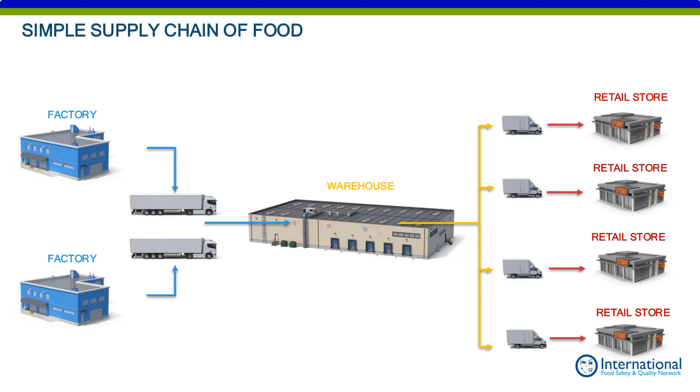And from here, maybe a lot of smaller transporting units are transporting products to the retail stores. And this is how we consider the supply chain, and how we understand the supply chain. But in this supply chain, what we consider as a safety issue is actually only temperature and hygiene.

And I know that this is true because when MFIT and the team participated in the Dubai Food Safety Conference last year in 2024, we put a questionnaire to all of these participants at the conference, and we asked them, what do you think is the biggest risk concern for safety of the food in transport? And everyone said it is temperature that is the biggest risk, and then a few places after it is hygiene.

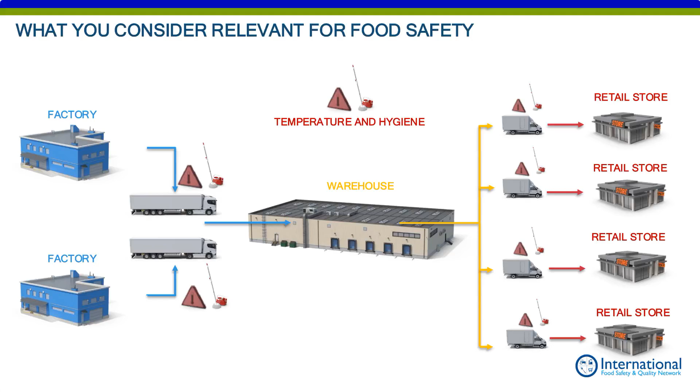But reality is quite different, because we have a start with the raw materials production, which is transported to a primary producer. The primary producer could be a mill that is producing flour. It is transported with the silo transport to the secondary production. This secondary production could be a confectionery or a bakery producer that produces the final product, and then as a final product, it is transported to the retail store.

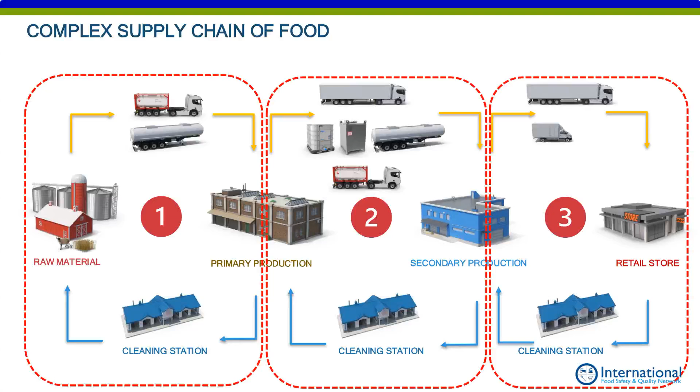In between all of these activities of transporting, producing, or selling, there is a cleaning of the transport, and there is a cleaning station. So you see now the supply chain becomes a little bit more complex. Looking at the supply chain, it doesn't go only inside of the country. Yeah, the supply chain can be even more complex.

Look at this complex supply chain for the chocolate example. There is sunflower oil that could be produced in Serbia, glucose syrup produced in Germany, milk powder produced in Poland, and cocoa mass produced in Switzerland. Then we have activities of loading in the different transporting units, and all of them transport these raw materials to the chocolate production that is located in Italy.

What is going on there in Italy? It happens actually that after it is unloaded, all the transporting units are going to the cleaning station, probably the cleaning station in Italy, because of the logistic chain and because it is more relevant to go there so as not to lose the kilometers or the money.

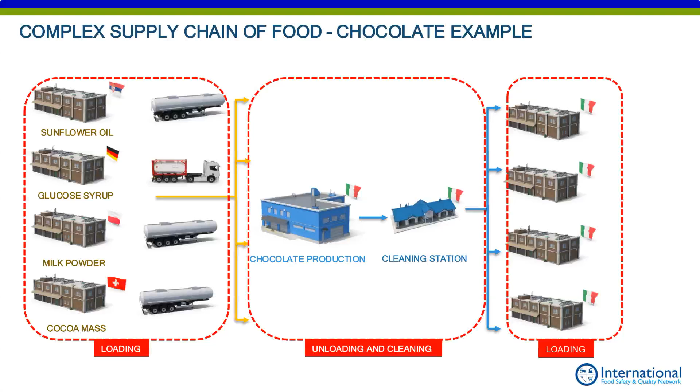After the cleaning station and after the cleaning, all of these transporting units will go probably to different factories in Italy to load other products. Yeah. So you see now this supply chain becomes a little bit more interesting. So let's just follow one supply chain.

For example, one transporting unit from the previous example could be transporting sunflower oil from Serbia to the Italy factory. Then it unloads this sunflower oil. Then it's empty, but it's dirty from the product, of course, and it goes to the cleaning station in Italy. After the cleaning, the clean transporting unit goes to loading again in an Italy factory, and here it can load milk cream, for example.

I use this example just to show you that now when this transporting unit is clean and loaded milk cream, practically it loaded also some kind of hazard, which means that it loaded, in this case, an allergen. So now we have an allergen in the supply chain. After that, this transporting unit is going to Austria, maybe to ice cream production. They unload this product, and then we have an empty and dirty transporting unit.

And this transporting unit is now dirty with the milk cream, which means that it is dirty from the allergen. If any insufficient cleaning happens here in the cleaning station in Austria, this means that even though this transporting unit is clean, it has some remains of the allergen, and then any additional loading could potentially contain this allergen. So this means that when this barley malt is loaded, it could contain the allergen within. Of course, what is the problem here everywhere, what I'm talking about?

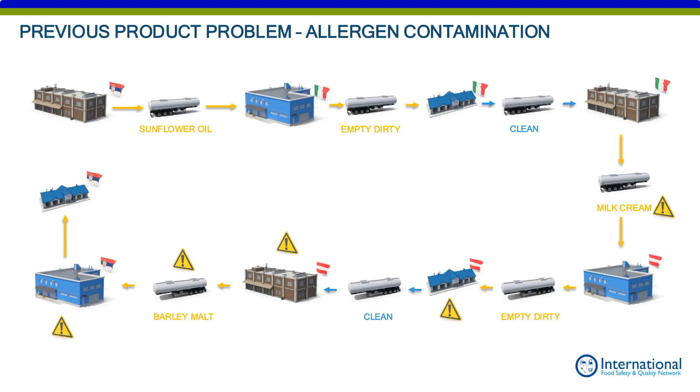Of course, in many cases, companies will define what is the allowed previous load. Companies will say, we do not allow this type of load before we are loading barley malt, because we don't want to have any potential contamination of our product. So this is how this supply chain becomes very complex.

Looking at the other example of the internal supply chain, I will show you how dairies are functioning in many cases. So let's look at the example of the dairy. We have a transporting unit that is collecting milk on one transporting line on this side. After it collects the milk from different farms in the morning, it returns back to the dairy, and raw milk is unloaded to this dairy, after which cleaning of the transporting unit happens, probably with the CIP of this dairy factory.

And after the cleaning is done, what is going on? In many cases, all over the world, this transporting unit is not owned by the dairy. It's probably some tank that is owned by a private company, and after it is cleaned in this first dairy, it goes and parks on the parking of the company, or in many cases, it parks in front of the house of the driver, who in some cases could also be the owner of the transporting unit. So please pay attention that this could have some influence on risks happening in the supply chain.

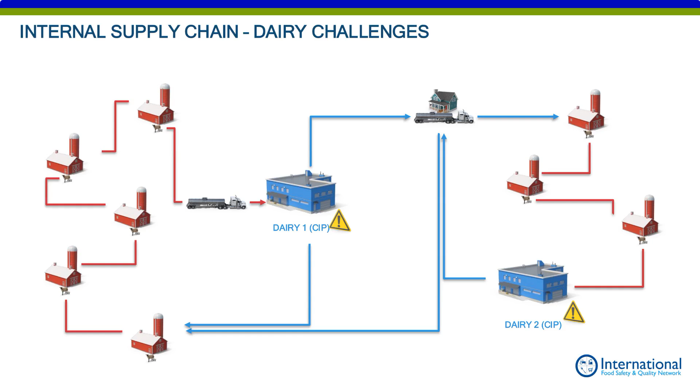So looking at the whole supply chain, there are lots of risks happening there. When we look at the loading process risks, there are insufficient controls of transport hygiene. Then the control of food defense and food fraud aspects, like using seals and documented evidence. Then control of transport suitability: is your transport suitable to transport the food? Then control of cleaning evidence, evidence of previous loads, and of course traceability. These are just the problems at loading for the primary producer or any producer doing the loading of the product.

Then there are risks connected with the transport units: the food suitability of transport materials, transport unit design, maintenance records, control of transport suitability, control of cleaning evidence, food defense and fraud suitability connected with the transport or transporting company.

Of course, there are risks connected with the unloading process. This could be connected with insufficient pre-unloading controls. Again, controls of food defense, food fraud, and cleaning evidence that gives you evidence of the previous load and that the cleaning was done in a sufficient way. Of course, controls of product, because we always do some specific controls of the product before unloading. And again, we come to the question of traceability.

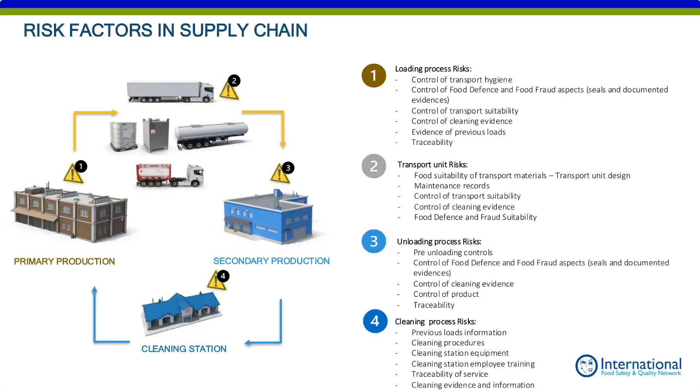And of course, in the whole supply chain, we always mention the cleaning station. Let's not forget it, because cleaning process risks also exist, connected with proper information about previous loads, the cleaning procedures and their application, cleaning station equipment, cleaning station employee training, traceability of the service, cleaning evidence, and of course, the information.

These are the risks, but what are the contaminants in food transport? I will say that the biggest contaminants are physical contaminants. You don't see them on this slide, but I'm always mentioning them.

And these physical contaminants are actually coming from the transporting units. It could come because of the bad design of the transporting units, but it could also come because the transporting units are old, they're always moving, there are some damages happening, there are different types of products transported, different types of cleaning happening, and of course there are lots of parts that are also made out from rubber, like some gaskets, closings, sealings, etc. And these could be all also physical hazards.

And in many cases, in order to prevent your facility, you need to have different kinds of sieves, filters, controls on loading to see for potential physical hazards. Of course, other contaminants and hazards can come from the point of view of biological hazards, which could be, of course, pathogen microorganisms, but also yeasts and molds and some of the indicator organisms coming from the cleaning station due to insufficient cleaning procedures or due to cross-contamination or any problems with the previous information of the transported product.

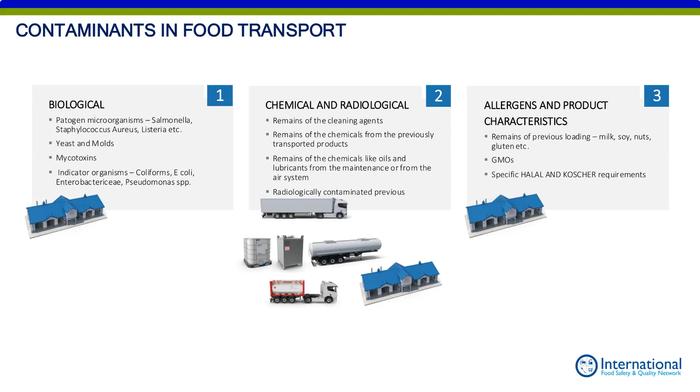When you do your hazard analysis as a part of HACCP, it also contains biological, physical, chemical, radiological, allergens, and also product characteristics as hazards. I have shown you on the previous slide where these risks are. So this is a supply chain. These are the risks in the supply chain. And we have shown you these cleaning stations that are doing the cleaning process. But who has defined this cleaning process or the cleaning program? Who is giving the requirements actually?

Some requirements are moved from the primary or secondary production and given to the transporters or the logistic companies. The other requirements are given in the legislation or given in the standards. But how is it given? It is given to those who are defined as FBOs or food business operators. So if you look at all the legal documents, all the requirements of the producers, and all the standards, food business operators are those who are handling the product. So no matter if you are producing it or transporting it or storing it, you are handling the product. This means that you are a food business operator.

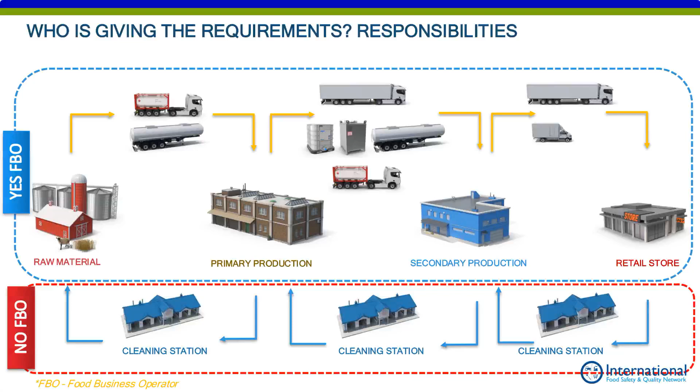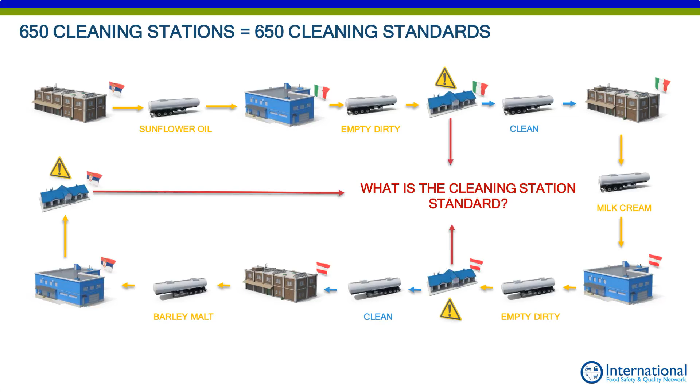But cleaning stations, which are not handling the product but are handling the service in connection with this product, are not registered as food business operators. And this brings the problem for the supply chain. Because in that case, you have to define for the cleaning station what they will do, and you have to have the knowledge to define the requirements for them. What happens at the end? The different cleaning stations, like in this example we mentioned in Italy, in Austria, in Serbia, are working according to different cleaning standards. And we always joke that 650 cleaning stations only in Europe means 650 cleaning standards. And this needed to be solved with unified cleaning procedures and unified standards.

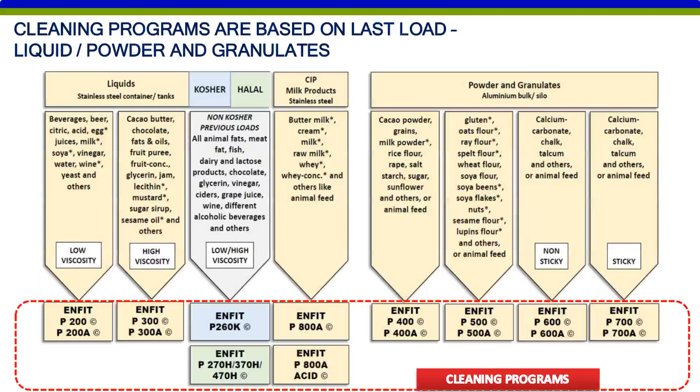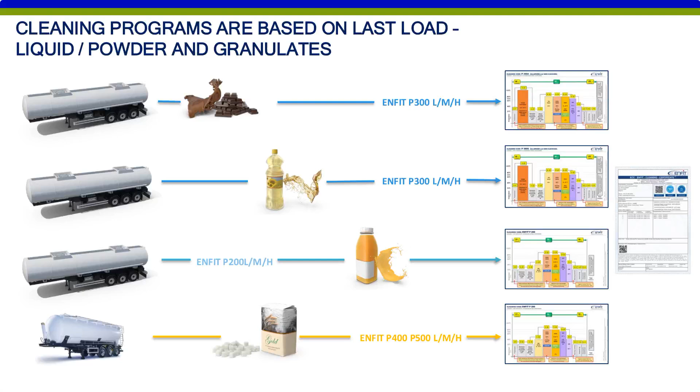This is why ENFIT, the International Association for Supply Chain Safety, sat down with the working groups and said, okay, now we need to define the cleaning programs based on the last load, no matter if it's liquid, powder, or granulate products, and also define specific cleaning procedures for kosher and halal. And this is what ENFIT has been doing in the previous years. In reality, it means that these cleaning programs are based on the last load: transport of chocolate, oil, juices, these are all liquid products but with different viscosities. And based on that, there are specific programs to be applied to clean these transporting units.

I will go shortly through these programs showing you how they work, but I will not talk a lot about them because today our focus will be on validation, verification, and monitoring of the cleaning programs, no matter which kind of cleaning programs are used. When you look at ENFIT cleaning programs, the idea is to have standardized cleaning programs in the whole world.

So this means that if you are using the ENFIT P300 program for cleaning of chocolate or this type of viscosity products, it could be low, medium, or high cleaning. And this is based on what steps this product will pass in your factory when it is received. So if there is some kind of step, as Tetra Pak says, a kill step in your factory, then you can use the standard of low cleaning. You don't need specific long cleaning, etc.

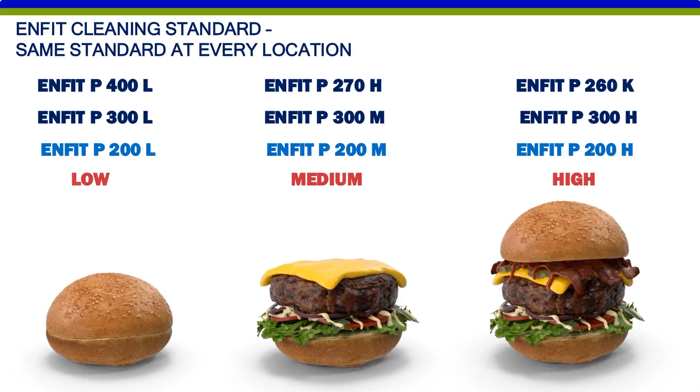But if there is no kill step, this product needs to be transported in very high safety conditions. Then you need a high cleaning, which lasts a lot longer and gives you, of course, support that the product is transported in a safe transport. So ENFIT cleaning programs, you can find them, of course, on the website. I will just mention that there are, as I said, low, medium, high.

It is based on the timing of the cleaning, but the procedures are the same in all of these programs, which means that cleaning must be performed completely of everything that is on the transporting unit. This means the hoses, the connections, the pumps, the manholes, the main tanks, the chambers, everything that is there on the transporting unit needs to be clean, no matter if it is a light, medium, or high cleaning.

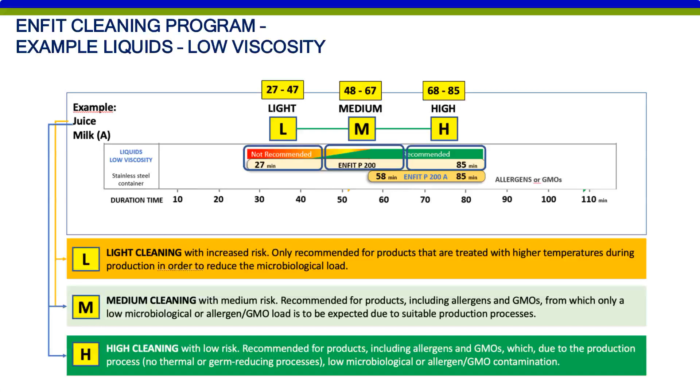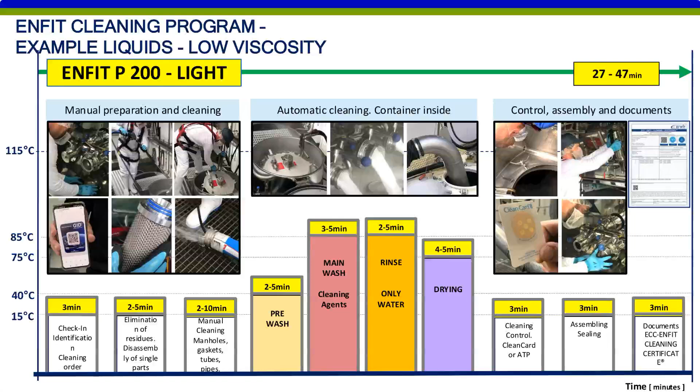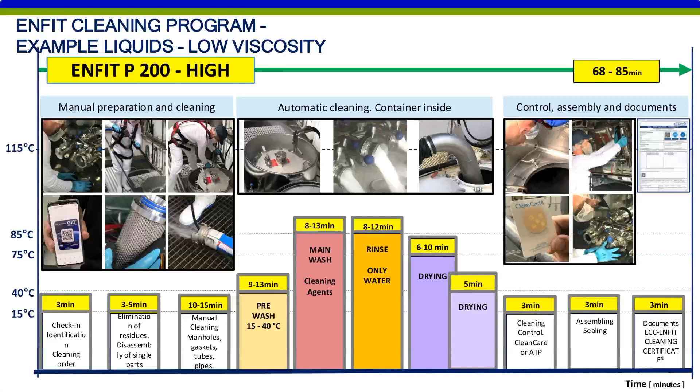So you see now how this timing changed from 68 to 85 minutes, and this timing is sufficient, of course, to clean it and have a transport that is practically safe from the previous load, but also safe for loading of your product, and that it can be guaranteed. So no matter if this cleaning procedure is defined or selected, what shall we do now?

So let's say, for example, you are a company who has a transporter and you are not directly responsible for selecting the cleaning station. In that case, the transporter selects the cleaning station himself, which means that before loading a product at your site, he needs to go for a cleaning. And this cleaning is done according to some procedures. The question here is, who defined these procedures? Is your company defining these procedures? Based on what? Is the transporter defining these procedures? And do you trust in his defined procedures? Or does everyone in the chain trust in the procedures of the cleaning station?

You know, in the previous year, ENFIT has done transport hygiene risk analysis in more than 50 companies, and we gathered results that, of course, the supply chain has many risks that I'm presenting to you today here. But also, we have gathered the information that these procedures are not defined very well, and even if they are defined, they are not respected after a certain amount of time.

So one of the main things that you have to do, no matter who defined the procedures of cleaning, if you're certified according to the standards for food safety, for example, GFSI certification schemes like FSSC, IFS, BRC, they are asking you to do the validation of the cleaning. So last year, we have done the validation of the transporting units for different cleaning programs of ENFIT, ENFIT P200, P300, and I will give you some overview of the validation steps and our conclusions, and I hope I will help you also in defining your own validation procedures for the cleaning of the transport.

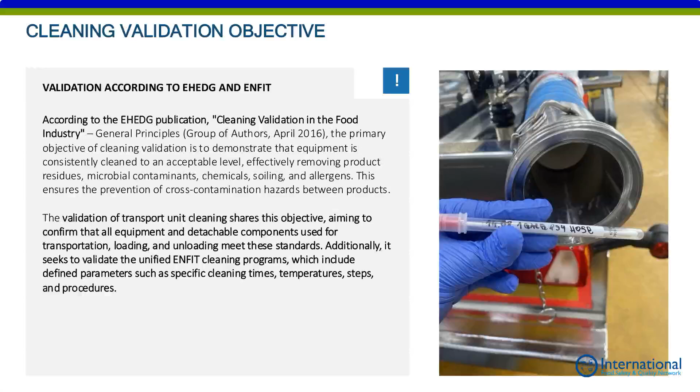So this ensures the prevention of cross-contamination hazards between products. So in that case, with the ENFIT working group, when we did the validation of transport unit cleaning, we shared this objective, aiming to confirm that all equipment and all detachable components used for transportation, loading, and unloading meet these standards. Additionally, we seek to validate ENFIT cleaning programs, which include defined parameters such as cleaning times, temperature, steps, and of course, specific procedures.

Once again, I want to just go through it with you. What is validation, monitoring, and verification? I know that you know, but this is just in the context of the transport. So validation is done before, and it means that it is performed after the cleaning program is established and proves that the cleaning program is effective and can be used. It must be performed according to predefined procedures, and it must be recorded. In case the cleaning program is not set up in a good way, re-editing of the process and revalidation should be performed before first approval of use.

So you shouldn't use the cleaning program if it's not validated and if it's not, of course, effective and showing that it works. Validation can be done in different ways, through auditing, testing, controls, through internal team use, through laboratory services, external team engagement, etc. When you have done the validation, when you have said that your cleaning program is effective, we need to do the monitoring then.

What does this mean? This means that every day we are cleaning our transporting unit according to the defined program. In the dairies, every day we are using this CIP program that is now defined and validated. But we need to set up some kind of monitoring. And this is done only for the validated cleaning programs. It is performed after each cleaning in the cleaning station, but it can also be done as monitoring at the steps of loading or unloading of the transport.

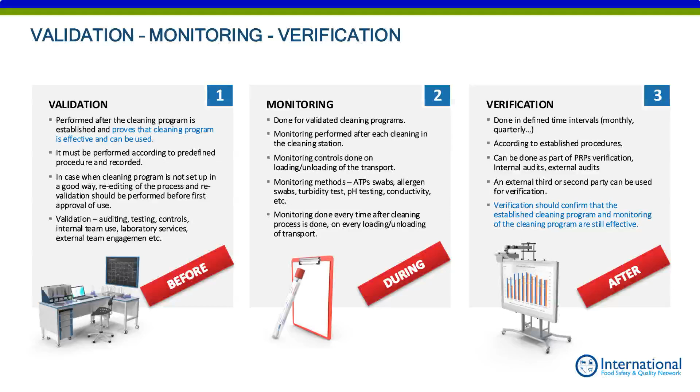If something changes in the system, I change the cleaning station, change the steps in the cleaning program, change the cleaning agent, change the transporting unit, I need to revalidate my cleaning programs. Now, when this is clear, let's go to the process of validation.

The first thing is to set up the validation protocol, and it looks similar to what we would do in the steps of hazard analysis, where the first thing is to set up the team, the validation team. So who will perform the validation? It could be an external team, it could be an internal team. It is important that there is specific knowledge.

In ENFIT, we have a lot of members, and these members have made a really nice group of experts, and these experts are coming from the cleaning industry, meaning the cleaning agent producers, from the equipment producers, equipment of the transporting units, also the cleaning stations, from the universities, etc. And this was the team for the validation.

Then you need to define the validation scope. It is maybe only just for one cleaning program or several cleaning programs, etc. How often should this validation be? I say it should be done every 3 years for the defined cleaning programs, but in case of any change, it should be revalidated immediately.

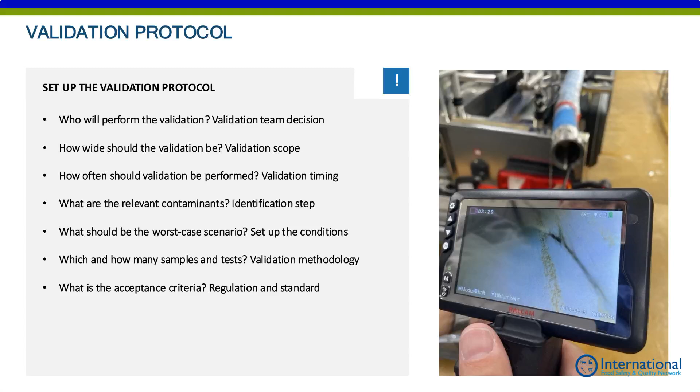Again, what are the relevant contaminants that you are focusing on? Maybe it's just allergens to confirm your cleaning program, but mainly it will be also microbiology and potentially control of the physical hazards. Then you need to set up a worst case scenario, which is not so easy when we talk about the transport, but I will show you some of the examples. Then we need to decide about the validation methodology and, of course, regulations and standards that we are going to follow.

Before we do all of that, maybe we decide about the validation, we need to do the preparation step. This preparation step means that you need to set up the conditions of the cleaning station. And this setup of the conditions means that you need to have adequate temperature, adequate pressure, adequate use of cleaning agents, water quality, cleaning equipment that is maintained and working, and of course, staff training.

So before we have done our validation, we needed to confirm that the cleaning station is working, everything as it should be. In this case, this was an ENFIT High QF certified cleaning station, and this is actually the first thing. For example, the temperature and pressure of the water must be monitored and controlled both prior to the commencement of validation and through the cleaning process.

The cleaning agents used must be approved for food industry application. The water used in the cleaning process must be tested at least annually. So for all of this, we needed the documents, we needed the confirmations, we needed to perform the measurement. And then we said, okay, cleaning station is ready. It can work. It can fulfill our cleaning programs, and the staff for cleaning is trained to do the proper cleaning.

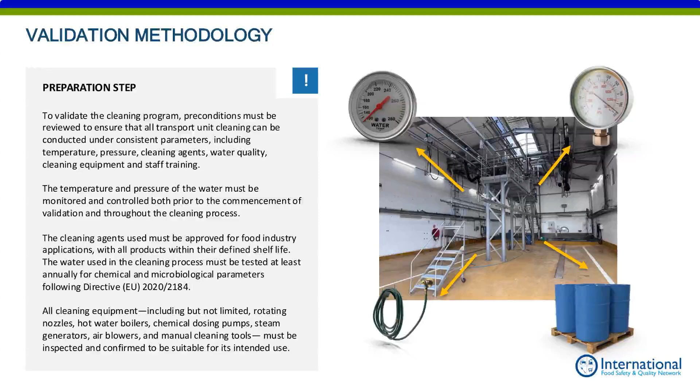We have done all the necessary measurement, and then we said, okay, now we have a transport unit that is in a proper condition that can be used. So we set up the transporting unit, and we set up also the cleaning station in this case. Then we had to decide which type of sampling and testing we will do, which means validation methodology. In this case, we said, okay, we will take also visual and sensory evaluation, use of borescope tool for detailed inspection.

Why did we want also visual and sensory evaluation? Because in many cases, these are the only evaluations that are done on loading sites. So when the transporting unit is coming to the loading site, only visual and sensory evaluation is done, which means looking and smelling that there is no visual water maybe standing, or that there is no visual dirt, or that there is no smell of the chemicals or the previously transported product. So we said, okay, this must go into our equation for the validation.

Only we use a borescope tool, which is a probe tool that can go inside of the hoses, pipelines, and air pipes and everywhere, so that we can inspect in detail what is going on inside. The second thing is microbiological testing. In this case, we decided to use the swabbing techniques and cleaning validation with the 3M quick swabs.

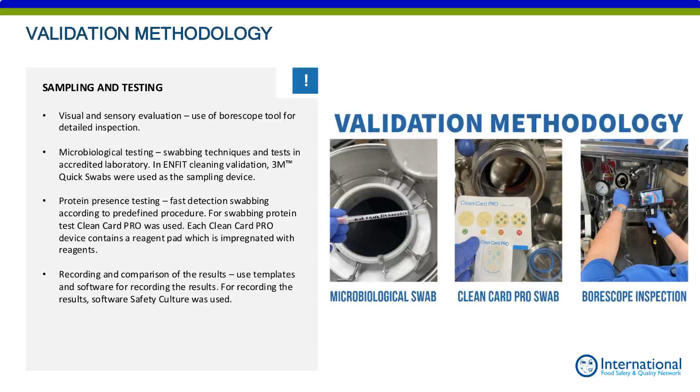So how do these validation steps go? The transporting unit is coming to the site. It is doing the check-in. It goes also for the cleaning. In this cleaning, what is done here is actually the complete process of the ENFIT approved program. In this case, it could be also your kind of program that you decided, maybe in your factory, etc.

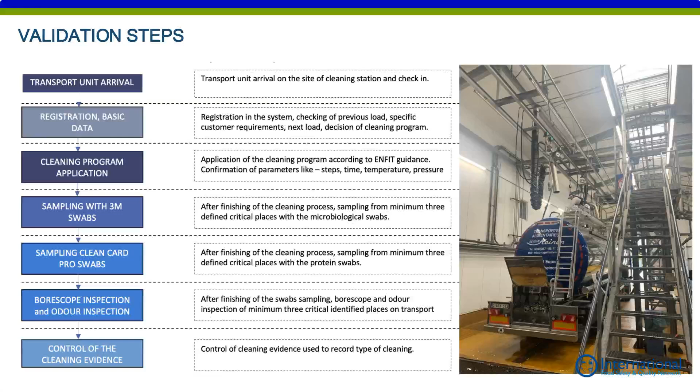And then it goes with the sampling of, of course, swabs from the CleanCards, etc. So at the end, it comes with a borescope inspection and, of course, odor inspection. And at the end, it comes to the control of the cleaning evidence. Okay.

I mentioned to you that you need to decide about the worst case scenario in this case. Worst case scenario is in many cases, when you do the validation inside of your factory, a little bit easy to do, because then you can use some kind of, let's say, test bacteria or indicator organisms and put it in the tested product that is passing, for example, the pasteurization.

Then you know that there is contaminated product, and after that you test it. After pasteurization, you test it in the laboratory, and you see actually that it is destroyed in this pasteurization, and this is how you validate the temperature and you validate the time.

But when we talk about the big transporting units, which could be like 25,000 liters, it comes to the question of what this means, worst case scenario. It's not so easy to contaminate transporting units of 25,000 liters of product. Of course, it comes also to the question of price and everything. But in this case, the worst case scenario we used was the maximum allowable time between cleaning and subsequent product loading.

So the decision was to simulate this, because in many cases, what would happen? The transporting unit is doing the unloading of the product on Friday. It goes for a cleaning, and then it stands on the parking lot for 2 days. And then again on Monday, it goes for the loading of the product.

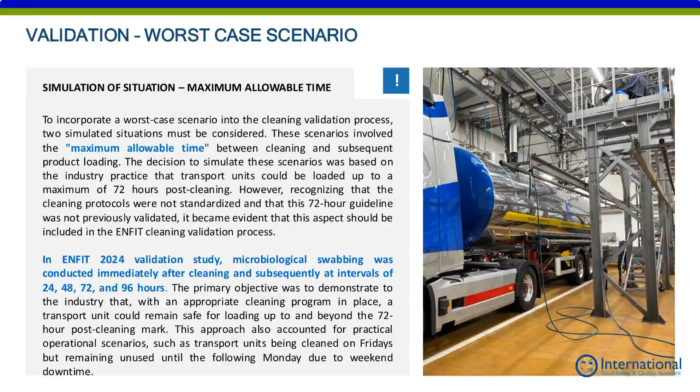Of course, some of the experts mentioned recently that there are also some kind of stickers with microorganisms that could be used, but mainly this is used in the industry, and we still have to test this in a transporting unit that is moving, a transporting unit that is this big, and also decide where the places are to use it. Of course, sampling places should be the same.

We tested minimum five transport units cleaned according to selected cleaning programs, but we always selected 3 swabbing places that could be critical. And on these places, we tested for microbiology, we tested for proteins, and we tested also visually. I see some of you are laughing regarding the borescope inspection, but this is not a GMP violation.

I'm sorry, Jairo. The GMP violation would be if this is not under control, but these are controlled conditions, and the borescope inspection procedure is defined as controllable conditions. In case something happens and the borescope tool is damaged during the process, then the complete cleaning of the transporting unit is done. I mention once again that this is not done when the product is transported; there is no product on the site. This is done at the cleaning station.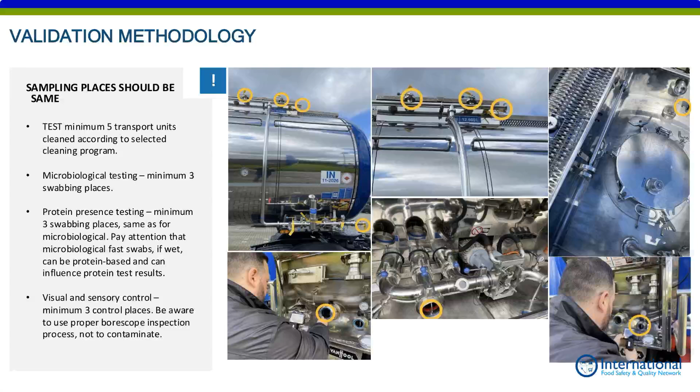So just to confirm that this was the idea, and this was the only way to inspect what is going on inside and to collect the proper data for the validation.

So regarding these validation results that we gathered, for your case, you will have to gather your validation results to understand what is going on in your system. We got information regarding microbiological tests where we confirmed that cleaning with high programs, which means much more time of the cleaning, is definitely destroying the microbiological potential contaminants, and especially we confirmed the effectiveness of the longest cleaning times, which is the timing more than 67 minutes.

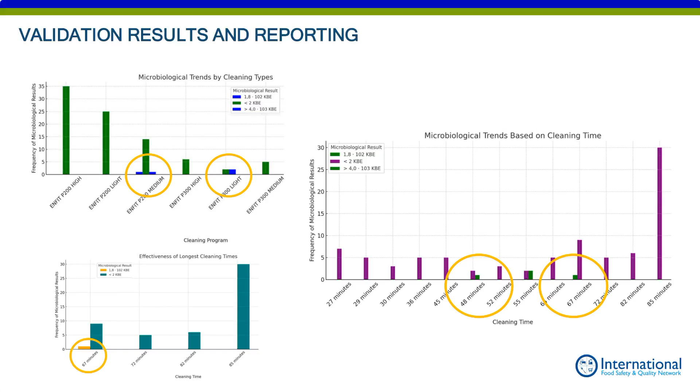Of course, there were also confirmed lower times for cleaning, which means that these low viscosity products that are transported can be also cleaned sufficiently without any microbiological contaminants, but this is also something for you to confirm. For us, it was important that we confirm that the timing higher than 67 minutes is sufficient.

We also compared the results of the protein swab and microbiological swabs. Regarding the protein swab results, we also confirmed that the higher cleaning programs, especially those which are higher than 55 minutes, are destroying proteins and any kind of protein remains.

Why was this relevant? It was relevant because in many cases you are transporting product that is microbiologically okay, which means that your transport is not contaminated, and there are no microbes that could be affecting your next product. But in many cases, you're transporting products that are proteins, and also these proteins could be allergens.

So this means if the cleaning was not performed correctly, there are remains of the proteins, potentially remains of the allergens, and in that case, you could contaminate the next product that is loaded. That's why we needed to confirm that our cleaning programs are efficient against microbiological contaminants, but also against the proteins.

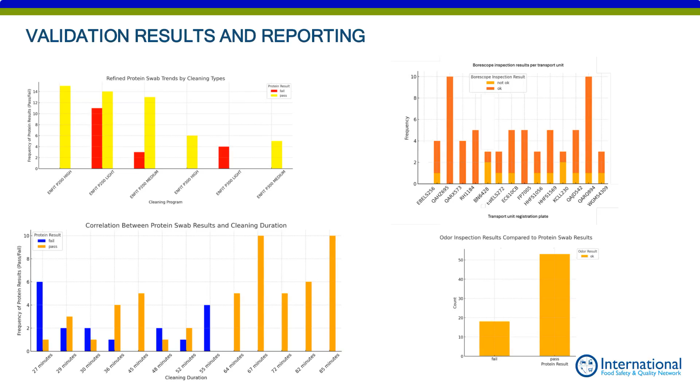Near the end, validation limitations. It is not so easy, as I mentioned several times, to perform the validation of the cleaning of transport units. Why? Because it is not the same as doing the validation of the tank inside your facility. Tanks in the facility are not moving. Almost always they are filled with the same product with the same viscosity.

There is regular maintenance which is under your control. There is preventive maintenance. You have controlled air that is going inside the tanks. Always the same cleaning procedure you use with your own CIP programs that are also under constant control of your internal laboratory. Almost always the same operators for cleaning that are trained, and there are internally monitored procedures.

Looking at the transport tank or silo, it is constantly moving, which means that everything moves inside of the transporting unit, but also this equipment is constantly moving. Potential changes of the product and viscosity, sometimes no regular maintenance and no preventive, sometimes no controlled air lines or filters, different cleaning procedures depending on the previous load, also different cleaning stations, level of trained operators, and different monitoring procedures in the cleaning station, loading, unloading sites, and customer requirements.

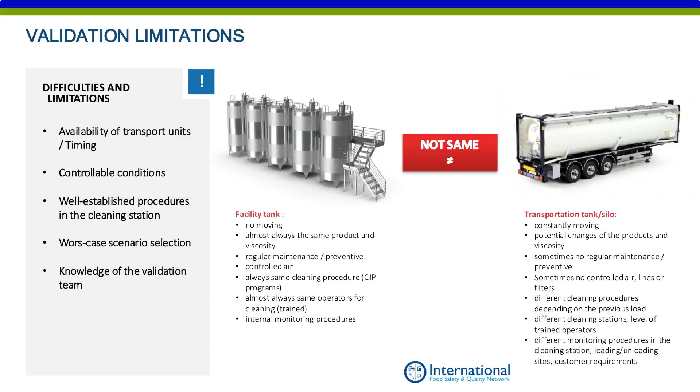It becomes a little bit difficult when you need to do the validation of transport tank, and if this is done by your transporting company that you engage or by the cleaning station, it could become a little bit expensive to do that, but you just need to do that.

Regarding monitoring procedures, I just left it here. These are the recommendations, meaning that you need to do the monitoring procedures on the cleaning station, which is after the cleaning. There are also monitoring procedures on the loading site or unloading site that have to be done on every loading and every unloading. And if some cases happen that there is a failure on the loading site, then what should be done is to completely perform the new cleaning according to the programs.

And also regarding the unloading site, the unloading should be prevented. The product should be stopped. But these are actually something to really think about.

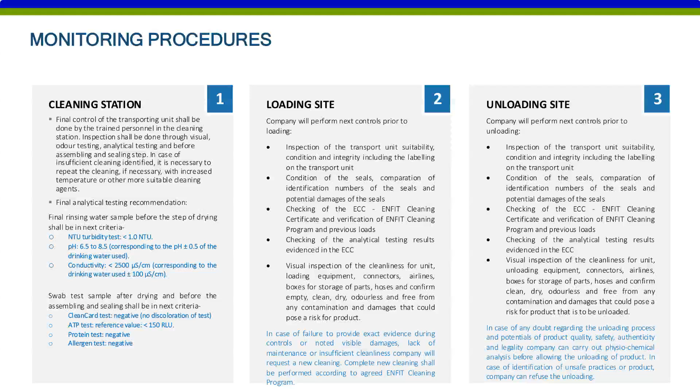Regarding verification procedures, of course, it could be the cleaning station, loading, unloading site, and the certification. As I said, the verification procedures inside the cleaning station could be done minimally once per year and include control of the cleaning records, traceability minimum of 3 months, or checking of training and application of cleaning procedures, etc.

And there are some recommendations about the final analytical testing listed here by our ENFIT working group. Of course, it's up to you how you're going to do that. We are saying here about some microbiological testing, about swab testing that can be done.

Regarding the loading, unloading site, verification procedures need to be done, especially as part of your verification of the prerequisite programs, which means that on your loading of the transporting units, you need to control the cleaning efficiency and that the hygiene maintenance is done in a good way. You can do it through laboratory sampling and testing with an external accredited laboratory, or together with the review of transport hygiene risk as part of HACCP, TACCP, and VACCP.

Regarding the certification, cleaning station certification is part of the verification procedures done by third-party trained auditors, and certification is done every 2 years. So this could also be part of the verification procedures for the cleaning stations.